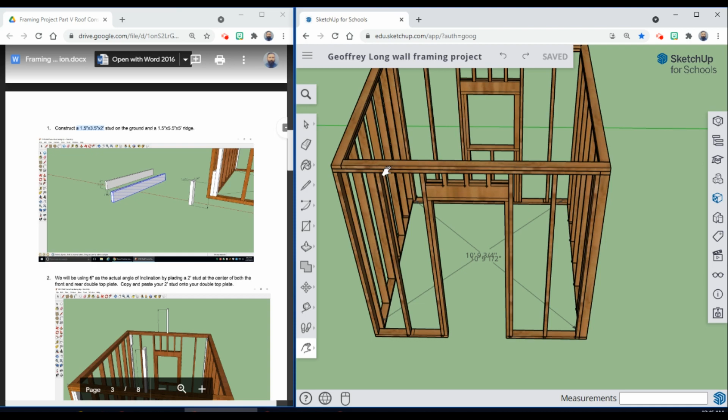And so what we're going to be doing is making sure that we have our base structure complete. So we have a door frame, we have a window frame, and we have two wall frames. Now this is an 8-foot by 8-foot shed, and we have our frames offset so that way they're tied in with double top plates. So that's the first part. That's going to be steps number 1 through 4.

This is step 5, right? So we're on part 5 of our project. And so we're going to be following these instructions here. And so we're going to scroll down to where it says number 1, and it says construct a 1.5 inch by 3.5 inch by 2 foot stud. This is going to be our gable stud.

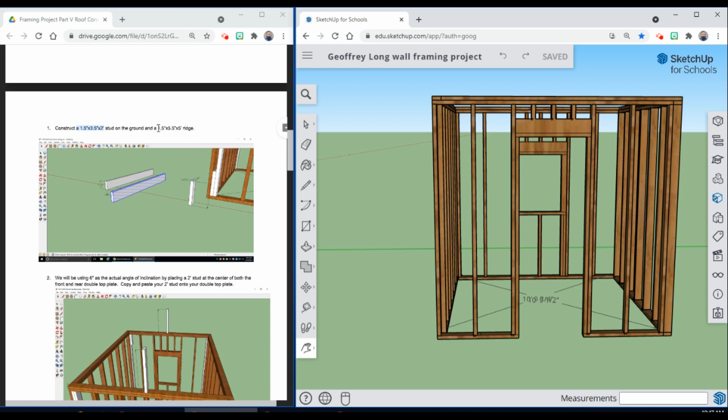And then on the ground, you're going to have another stud, which is going to be your ridge board. That's going to be a 2 by 6. So that's going to be 1.5 by 5.5. And we're going to make that 5 feet long. So we're going to start off with this gable stud first.

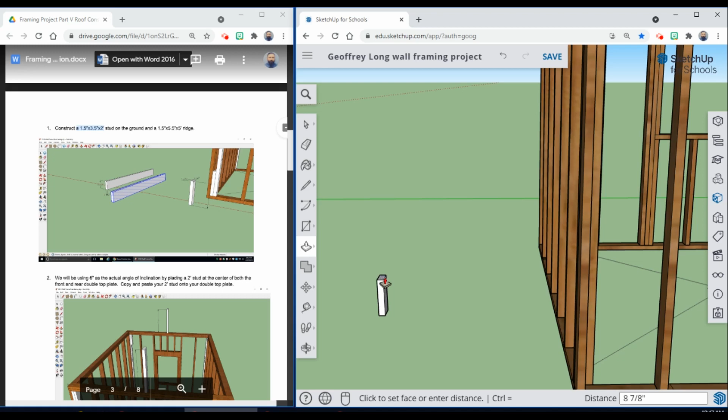Let's go over to our rectangle tool. Scroll down so that we're on the blue axis. I'm going to type in 3.5 inches, comma 1.5 inches. Now before you hit enter, just make sure that those measurements are correct. Hit enter. Go to your push-pull tool and pull that up by 2 feet. Then you're going to triple click on that, make it into a group.

And now what we have to do is before we place that, we have to set some guidelines where we're going to be placing that, okay? And so we want to be on the center point of our area. And so what we're going to do is we're going to go to our measurement tool, tape measure, and then from the end point, you're going to bring it over.

You're going to type in 4 feet, 3.5 inches. Hit enter, and that's going to give us our mark. So you can see the mark right there. That's going to be where we're going to be placing our midpoint of our gable stud on that mark.

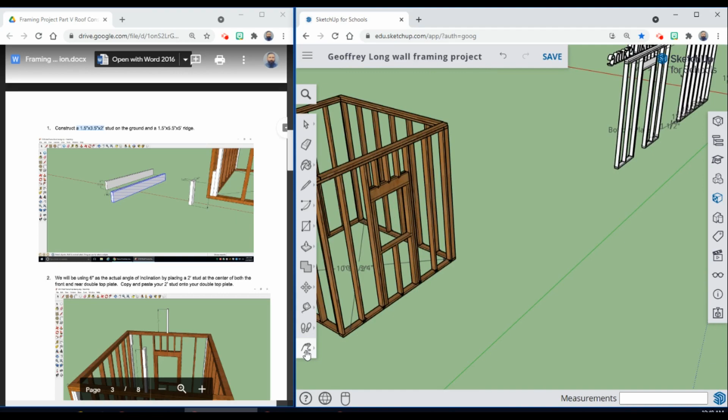Okay, so we're going to rotate around to the back side, and we're going to do the same thing on the back side of our shed. So we're going to rotate this around. And again, we're going to go off of this side right here, and I'm going to go with my tape measure tool, go to the end point, and then type in 4 feet, 3.5 inches. Enter. That's going to mark the other side. That's where my gable studs are going to be located.

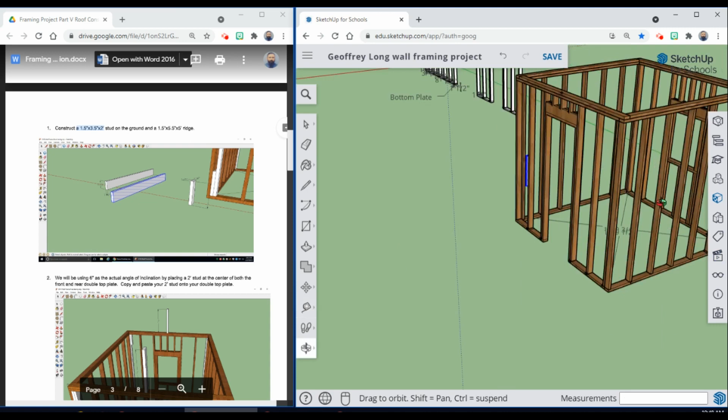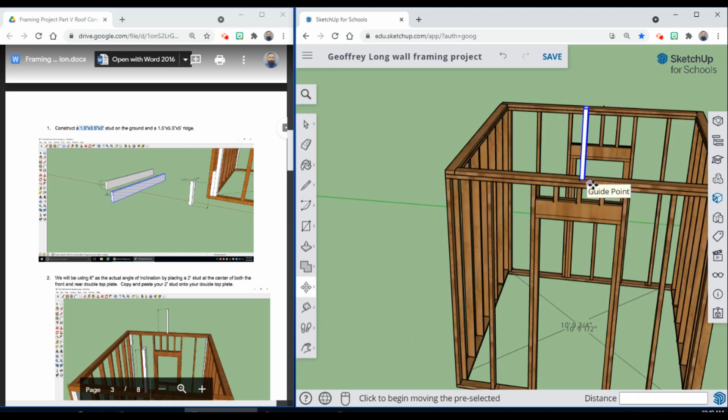And so what I'm going to do is I'm going to go down here, select my gable stud, and bring it up to the top. Okay, so let's go ahead and rotate this over. So select your gable stud. Use your move tool. Go to the end point, bring it up. Scroll in. And then from your midpoint on the group, you're going to bring it to the guide point. Okay, so you just lined up the midpoint of our gable stud with the midpoint of where our guideline was marked on our double top plate.

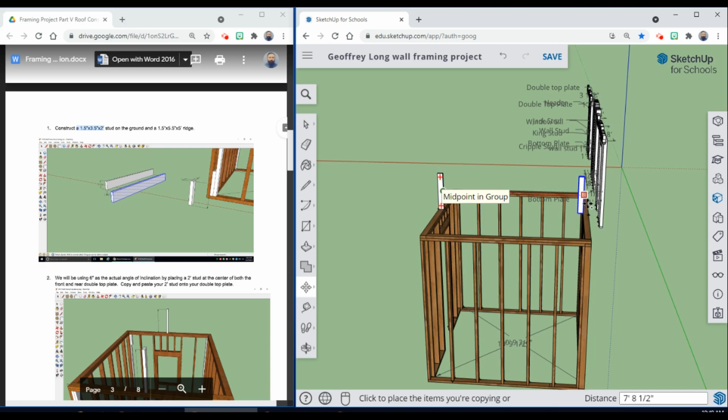So I'm going to rotate this around. I'm going to hit Control while I have my move tool selected. That's going to make it into copy mode. And I'm going to copy that over to the other side. Okay, so I'm going to place it and scroll around, zoom in, hit the move tool, select the midpoint, then midpoint to the guide point. Okay, so now both of our gable studs are in place.

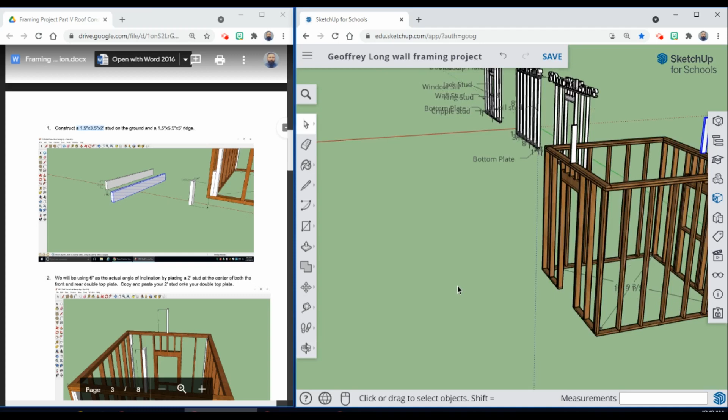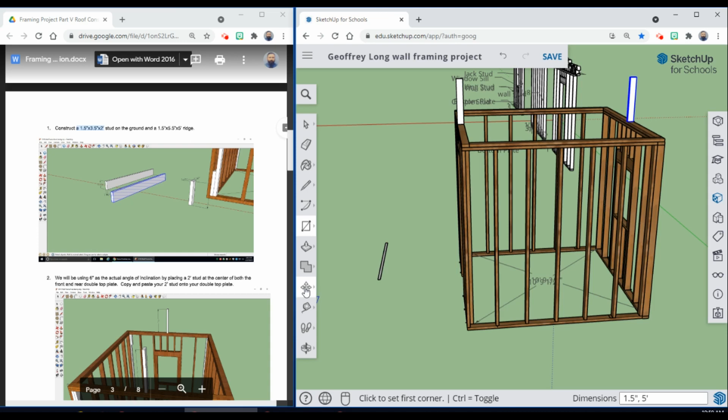And so now what I'm going to do is I'm going to draw my ridge board. And so let's go ahead and go over to our tool here. And so on this one right here, it's going to be a 5-foot long ridge board. And I'm going to have it as 1.5 inches, comma 5 feet. And then I'm going to pull that up. So go to my push-pull tool. I'm going to pull that up by 5.5 inches. Okay. Now I'm going to triple click on that, make it into a group again.

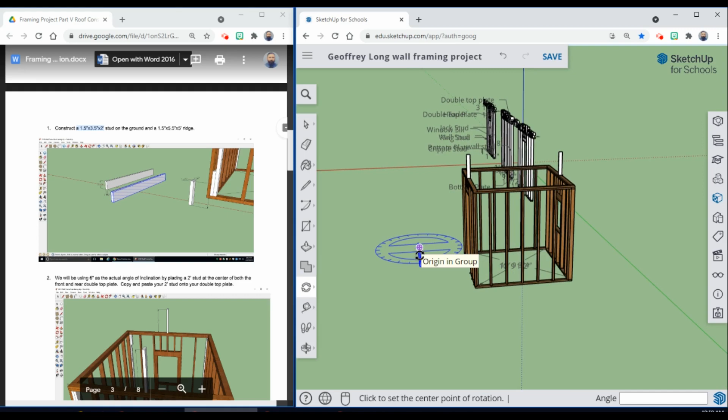Now with this one right here, I am going to have to rotate it. So I'm going to go to my rotate tool, make sure I'm on the blue axis. I'm going to click on it again, rotate it to the direction that I want. Let's make sure we're on the blue axis here. Let's scroll in a little bit. So rotate tool on the blue axis, and then we're going to just rotate this to the direction.

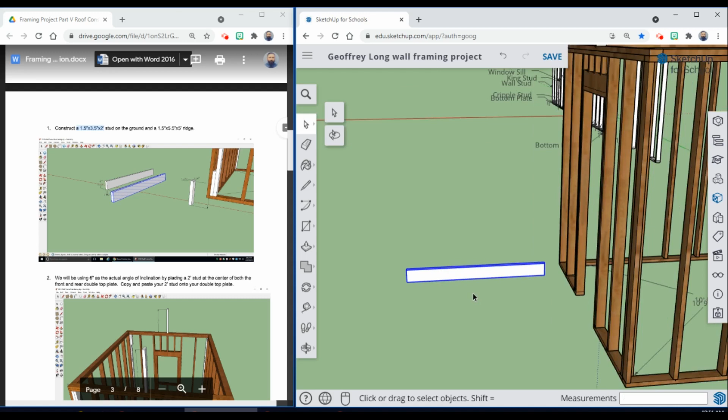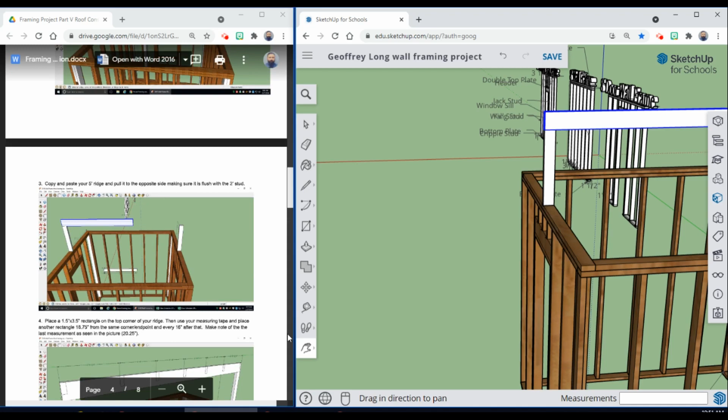Now, once we have it rotated, we're going to bring our move tool and we're going to move it up into place. So on the end, we're going to bring this up to the corner, and we're going to make sure that it's lined up on that corner. Now what we have to do is, just like the directions say, you're going to be taking this 5-foot ridge and you're going to be pulling it over to the opposite side. And so I'm going to move this over here. I'm going to select the end of the ridge.

So you've got to kind of rotate around until you can see the end of your ridge board. Okay. Now because this is a group, we're going to hit Edit Group. I'm going to select this face right here, and then using my push-pull tool,

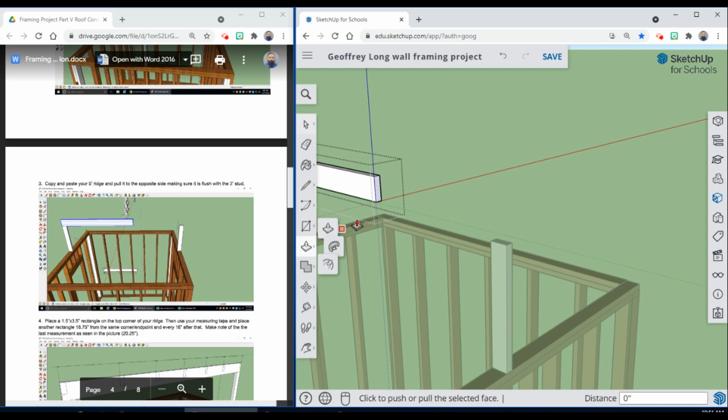Okay, so there's our ridge board, there's our 2 gable studs, and so now we're scrolling down here, and this is where we're going to start placing our rafters. So you're going to go right here and you're placing 1.5 by 3.5 rectangles on the top corner of your ridge. Then using your measuring tape, you're placing another rectangle 18.75 inches from the same corner, and then 16 inches after that. So we're going to use our rectangle tool.

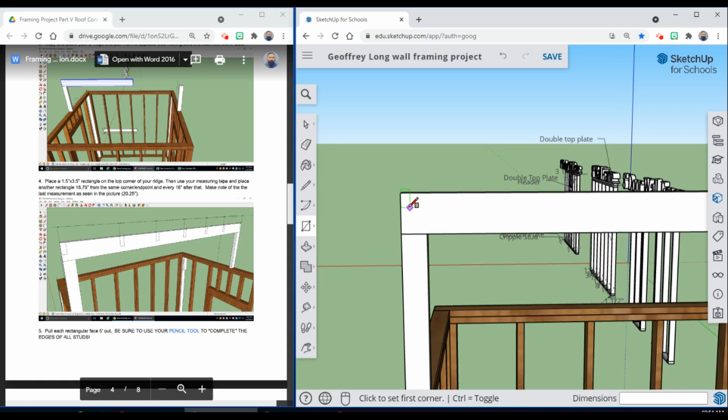We're going to start with this right here. We're going to go 1.5 inches, comma 3.5 inches. Hit enter. And then using our tape measure tool, from the top corner, we're going to go 18.75 inches. And we're going to do from that point 1.5, comma 3.5. We're going to do this all the way down, right?

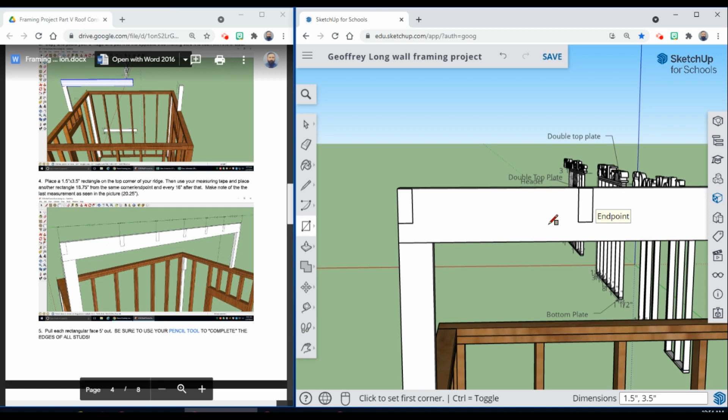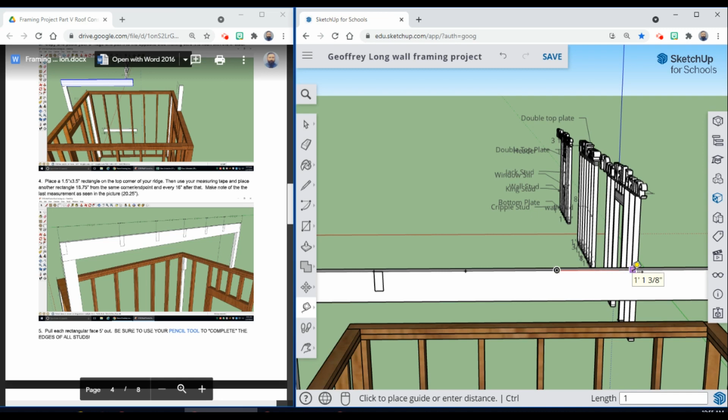So we have that. Now from that edge, we're going to go 16 inches. Okay, so from this edge right here, we're going to go 16 inches all the way down our line, right? So we're going to have that 16-inch mark. And then from that point, 16 inches. And from that point all the way down. So we're going to mark all our marks now. That way we don't have to come back. And then this last one is just going to be on the edge.

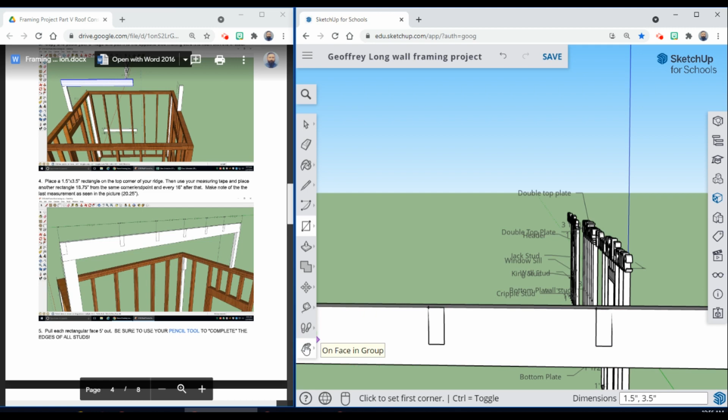Okay. So now we're going to take our rectangle tool, and now we're just marking 1.5 inches, comma 3.5 inches all the way down. And our last one on the edge.

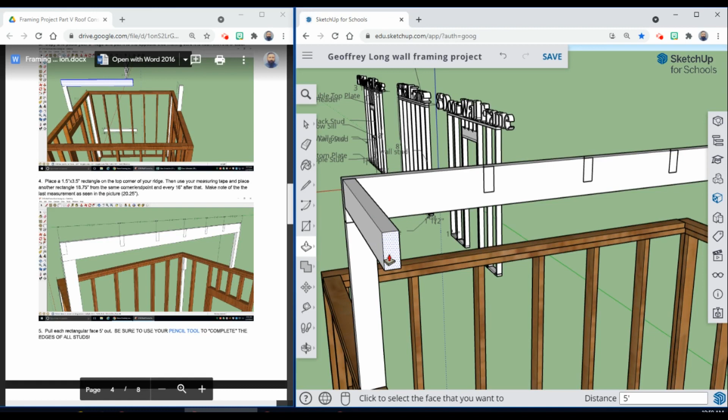Okay, so the next thing you're going to do is you're going to start pulling all of your rafters out. So you're going to pull this out, type in 5 feet, hit enter. You're going to do that on all of them. Type in 5 feet, hit enter. You're just going to go all the way down doing the same thing. 5 feet, enter, until all your rafters are just facing straight out.

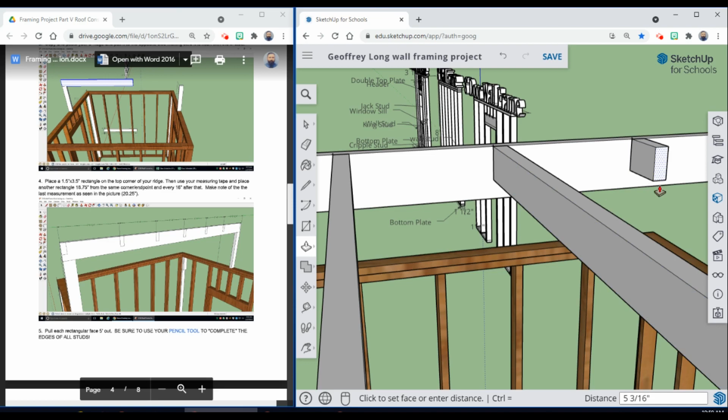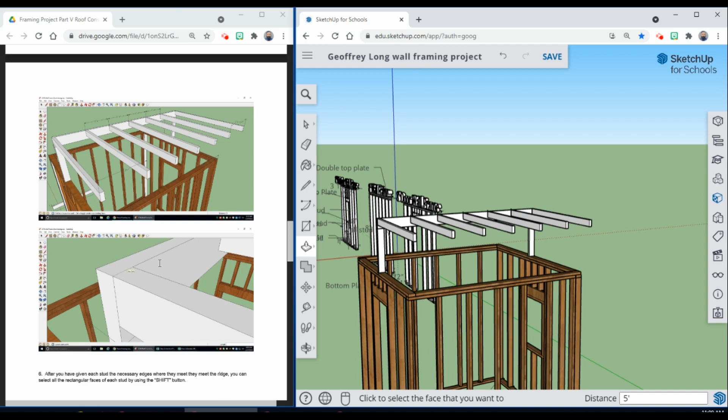Okay, so now we are here. This is where we're at right now. So the next thing we have to do is use our pencil tool, and we're going to be drawing in this line on the top. This is going to allow us to move these up and down. So using our pencil tool, we're going to go up here to the top, and you're going to draw a line going from end to end on all your pieces.

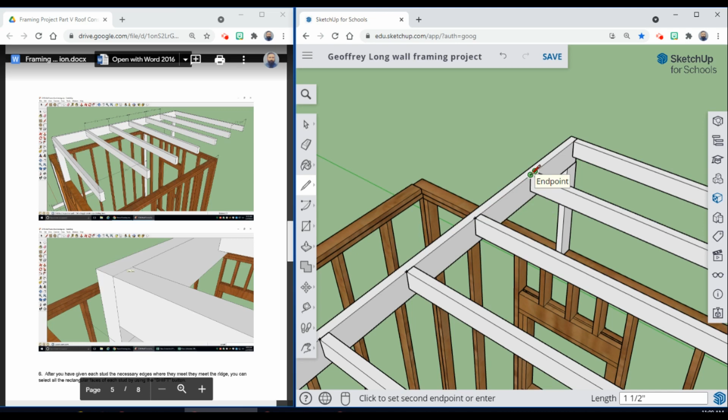This is just making sure that all your pieces are connected, so that way when we try to move these down, they will move. So again, pencil tool, endpoint to endpoint on all your rafters. Okay, and now what we're going to do is we're going to move these rafters down. And what I want you guys to do is select all your faces.

Okay, so this is where we're at right here. And so we're going to be selecting all of our faces at the same time. So I need you to make sure that you can see all your faces at one time. You're going to use your select tool, and you're going to select the face. You're going to hit Control, and then you're just selecting the faces. Make sure that you're selecting the faces and not the edges. And so if you end up hitting an edge, you're going to have to start over.

So we can probably zoom in a little bit. So I'm going to hit this. Make sure you have the faces only. So you saw how I had a blue edge. I had to start over. Now you could do these individually, but that's going to take you a lot more time, and all of your pieces will not be the same.

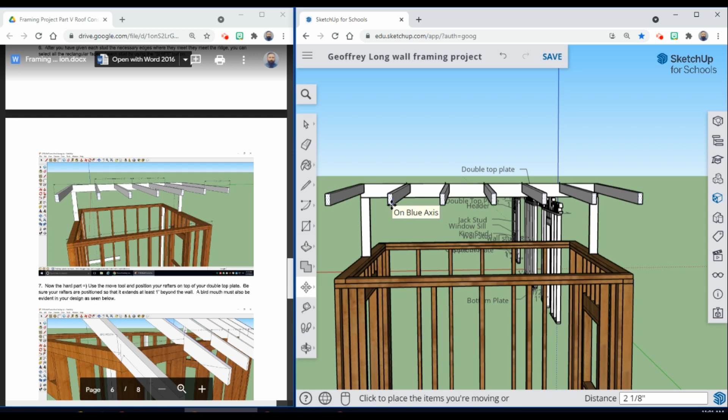So now we're going to use the Move tool, and we're going to make sure that we're on the blue axis. So hit your up arrow key on your keyboard, and you're moving these down until it's sitting right on top of your first top plate, right? So you're going down through the double top plate, and it's going to be sitting on the top of the first top plate. So it should look just like this.

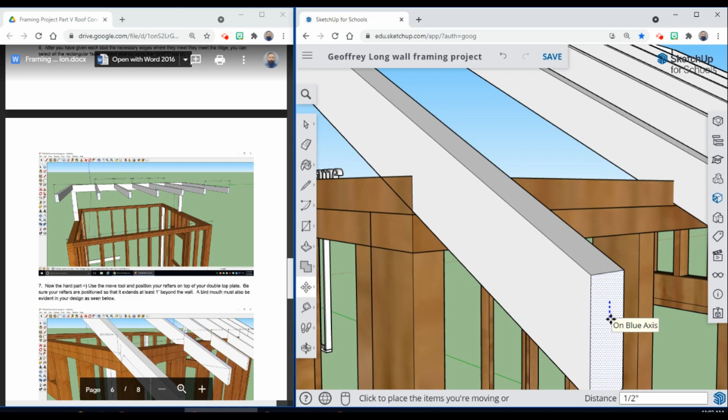Okay, and then what this is replicating is our bird's mouth joint. So when we build this roof right here, we're going to be cutting out this bird's mouth joint, and your rafters will be sitting on top of that double top plate. Okay, and so that's the first side.

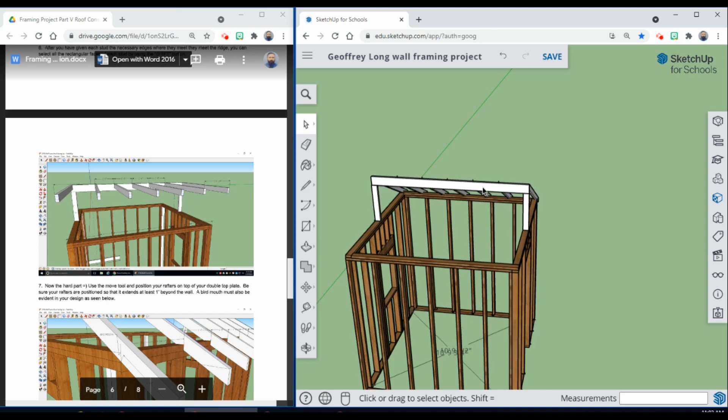Now you're going to do the same thing on the other side. So you're going to start from this edge right here. You're going to go over by 18.75 inches, 16 inches all the way across, and then do the same thing that you just did on this side.